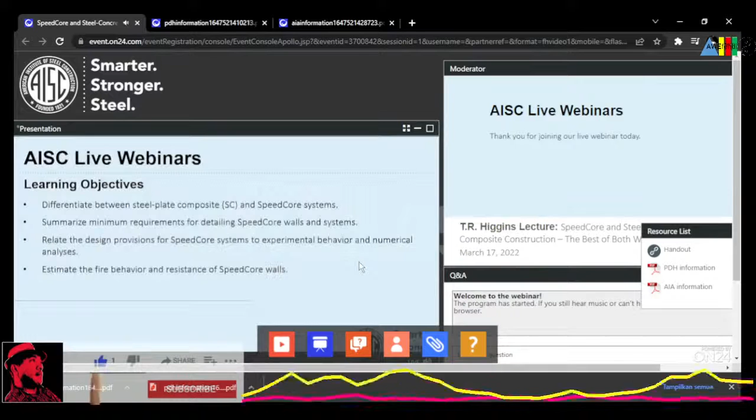Dr. Varma received his bachelor's degree from IIT Bombay, his master's from the University of Oklahoma, and his PhD from Lehigh University. He's been an academic for 20 years, 16 of those years at Purdue University. Varma has dedicated his academic and professional life to the development of innovative steel concrete composite structures for the built infrastructure, including commercial, industrial, and safety-related nuclear structures. He has conducted fundamental research leading to the development of design provisions for composite members, connections, and overall structural systems subjected to extreme loading conditions, including seismic, fire, blast, and impact loading.

Dr. Varma serves on many committees, including being the chair of the AISC Task Committee 8 on Fire Design. He is a member of Task Committee 5 on Composite Design, and he's also a member of the AISC Committee on Specifications, as well as the ASCE 7 Standard Committee.

Dr. Varma has received many awards throughout his career, including the AISC Milek Faculty Fellowship Award, the AISC Special Achievement Award, and the ASCE Shortridge Hardesty Award. Newly added to that list is the 2021 T.R. Higgins Lectureship Award. Today's presentation is the 2021 T.R. Higgins Lecture. Dr. Varma, thank you for being here, and I'll hand things over to you.

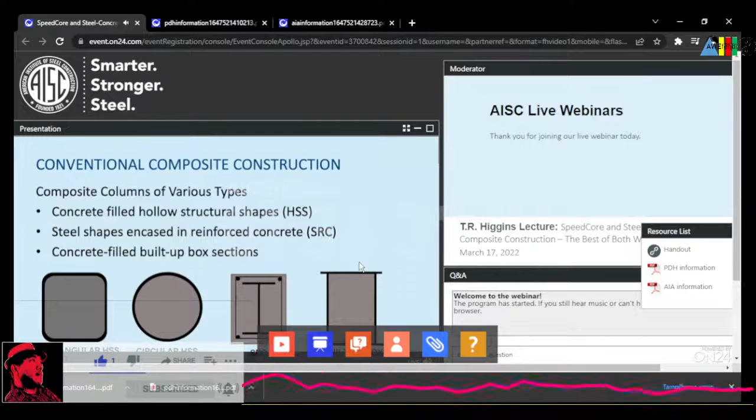Composite columns of various types are now part of the construction folklore. Whether it is concrete-filled hollow sections or concrete encased steel shapes, different shapes and sizes are in use. My first introduction to composite columns came with some prominent examples, like the Columbia Center, 2 Union Square in Seattle, and other innovative designs all around the world.

The 2 Union Square in Seattle deserves a special mention because it inspired my PhD research at Lehigh on high-strength concrete-filled tube columns. It uses these mega CFT columns in the lateral system to optimize design. I mentioned this structure in my dissertation as well.

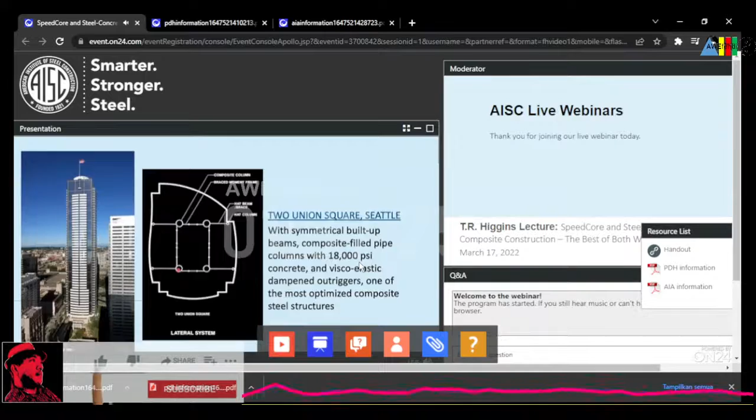Another excellent example of composite construction is the Gateway Tower, or the Seattle Municipal Tower. It uses mega CFT columns at the corners, as shown here. These beautiful structures and others around the world have inspired decades of research and development. We have now got design guidelines and provisions to classify and design different types of composite columns and structures for wind, seismic, and fire loading. Some of our research has contributed to these latest codes and guidelines from AISC.

The SpeedCore system has evolved organically from this past with steel concrete composite construction. C-PSW/CF, or composite walls, consist of steel modules filled with concrete. The steel modules consist of steel plates, tie bars, and maybe shear studs. There are no rebars at all, and no need for formwork or falsework for construction. These composite walls can be used as shear walls or elevator core walls in lieu of conventional reinforced concrete walls.

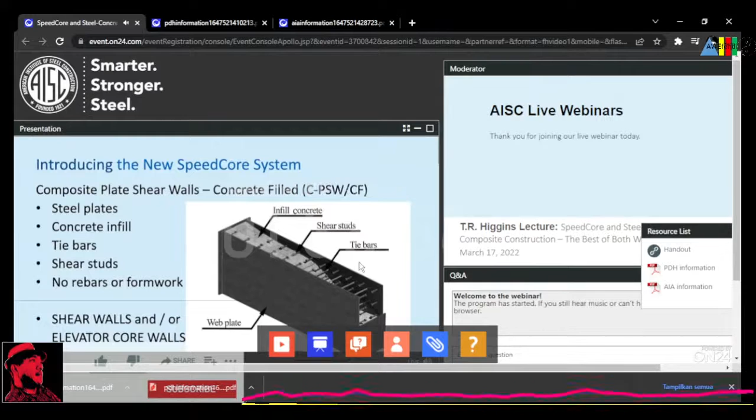The most prominent example of SpeedCore is the beautiful Rainier Square structure in Seattle. Placed next to the Rainier Tower, this building is the newest icon added to the Seattle skyline. Magnusson Klemencic Associates are the structural and civil engineers with some very special partners, architect and client. The contributions, early engagement, and detailed discussions with the steel fabricator and erector were key for the success of this project.

The main reason for considering SpeedCore for this project was the speed of construction. The structure was constructed in 10 months, providing savings of about 8 months as compared to conventional reinforced concrete construction. The structure and its conceiver, Ron Klemencic, are so iconic that they both ended up on the cover of the Engineering News Record.

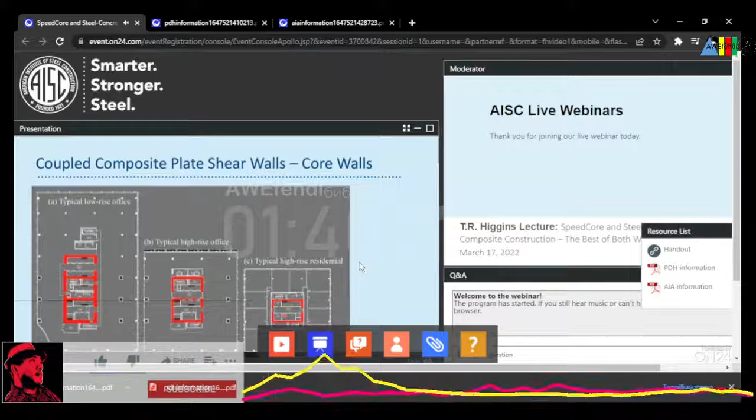From an engineering perspective, the coupled composite core walls are highlighted within the structural floor plans along the structure height here. They are replacing the conventional reinforced concrete elevator core wall structures.

SpeedCore walls are remarkably similar to steel plate composite walls used in the design and construction of safety-related nuclear facilities, like the AP1000 plant being constructed in Vogtle, Georgia. Extensive research has been conducted over the past 15 years on SC walls, and we were able to leverage all these findings for SpeedCore as well. Particularly, the section detailing requirements to prevent local buckling and the shear strength equations are coming directly from this original research on SC walls.

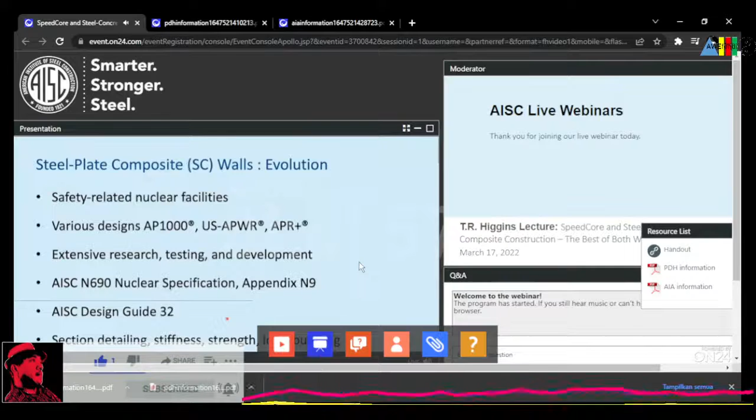Even the containment external building of the AP1000 is made of steel plate composite SC walls, and I was fortunate to conduct the testing, analysis, and support the performance verification of this structure as well.

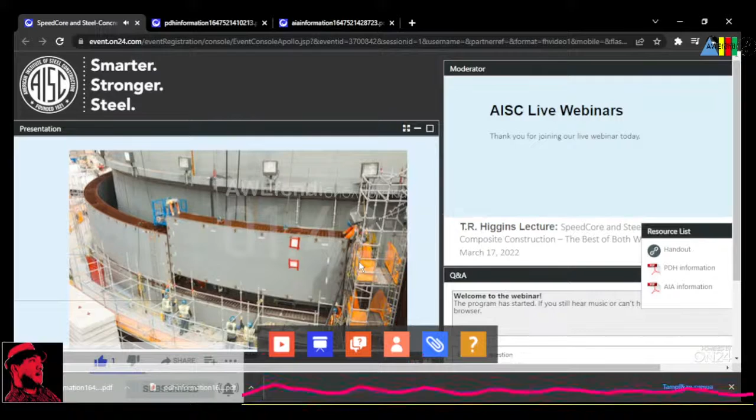Decades of research and work led to the development of the AISC N690 specification, Appendix N9, which covers the design of SC walls for nuclear structures. An AISC Design Guide 32, based on this specification, has been available and used even for SpeedCore projects. I was heavily involved with these publications as well.

That completes an introduction to the system and its use and history.

Since these modules are so technical, and I end up making the presentation remotely due to the pandemic, I wanted to infuse some humor to keep the audience engaged. But all I could come up with were inside jokes.

Module 2 of this presentation will focus on section detailing requirements, limits, and strength provisions. Some of these are leveraged from years of research done on nuclear facilities.

Now, these are the key components of SpeedCore composite walls. Just a reminder or a reference picture, it's really quite simple: the steel plates or module, tie bars and shear studs, and then the plain concrete infill.

For the steel plates, the minimum and maximum reinforcement ratio limits are 1% and 10%. These are based on the range of parameters considered in research. The steel plates have to be connected to each other using ties. These ties can consist of steel bars, rods, or shapes. To prevent local buckling and develop composite action, the steel plates must be anchored to the concrete infill using studs, ties, or a combination of both.

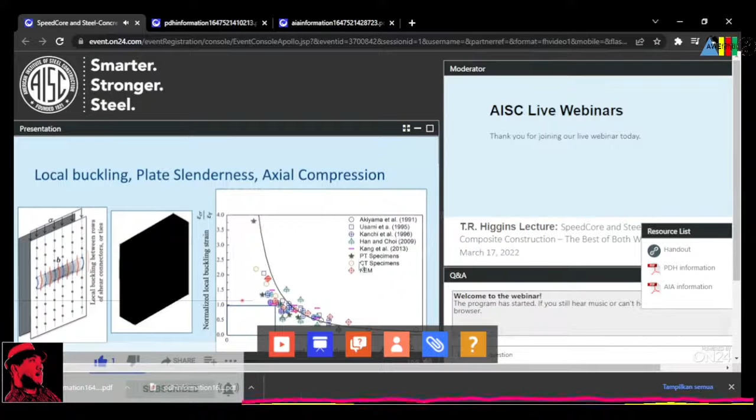Using these experimental and numerical results, plate slenderness requirements were developed to ensure compactness, that is, yielding in compression occurs before local buckling. Equations were also developed for slender plates, but the code requires non-slender or compact plates for design. These requirements are a little tighter for seismic design, as they very well should be.

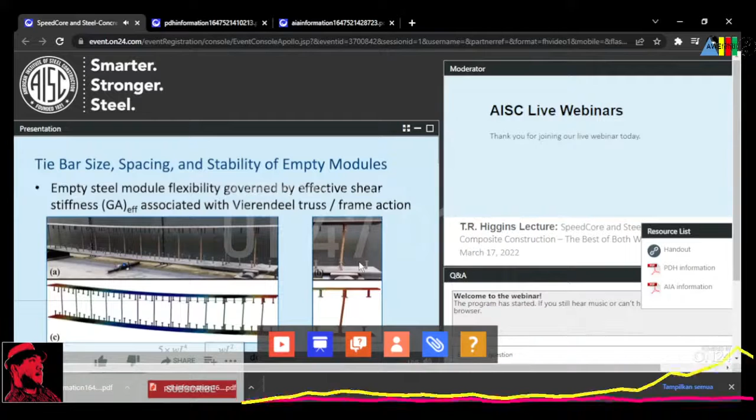Now, the design of tie bars is often governed by the design requirements for empty steel modules before concrete placement. Experimental investigations and numerical studies show that the flexibility of empty steel modules is dominated by the effective shear stiffness associated with Vierendeel truss or frame action. This is useful when considering behavior during transportation, handling, and erection activities. The stability of empty modules during erection, construction, and concrete placement is an important design consideration, which ends up actually governing the tie bar spacing and size and detailing.

We looked at the global buckling of a unit width of the empty module, which is conservative but representative. Unit width is defined by the tie bar spacing in the horizontal direction. We found that the critical buckling of empty modules is governed by the same effective shear stiffness, GA effective, which is based on Engesser's equation of shear buckling, not Euler's. This makes the critical load almost independent of the length and end conditions, which is quite remarkable.

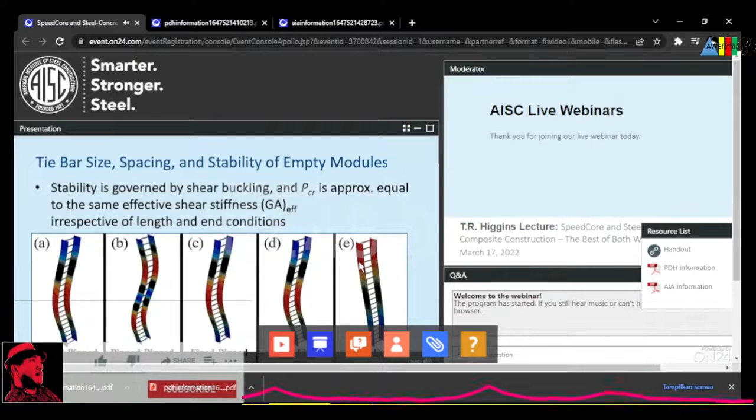We were able to confirm this theory and mechanics-based model of empty module buckling using tests conducted previously at Purdue by some of my senior colleagues. You are seeing the buckling of the empty module right here from our laboratory.

Using these experimental and analytical results, we developed minimum requirements for the stiffness of empty modules to simplify design checks. The minimum tie size and spacing requirements are summarized here. Alpha is the ratio of the steel plate flexural stiffness to the tie bar flexural stiffness. It governs the value of GA effective and thus the tie spacing to plate thickness ratio.

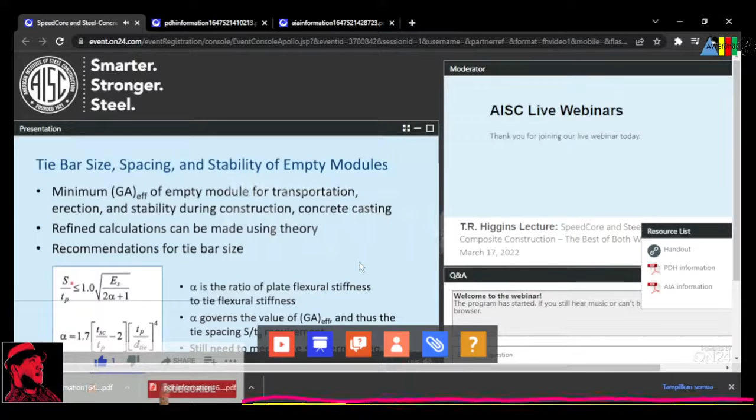This requirement is to be used along with the local buckling slenderness requirement presented earlier. Together, these two govern the section detailing of composite walls. For instance, an example calculation here shows that for a 24-inch thick wall with half-inch thick steel plates and 1-inch diameter tie bars, it requires a maximum tie spacing of 25 inches for global stability and stiffness of the empty steel modules.

But it also requires a maximum stud or tie spacing of 14 inches for local buckling in the composite phase after the concrete has set. Both these requirements have to be met, and therefore different design details are possible. One, only with ties with a spacing of 14 inches and a diameter of 1 inch. Or with tie spacing of 24 inches and corresponding stud spacing of 12 inches to meet both the requirements.

Now these are the recommendations for the effective stiffness values when modeling SpeedCore walls for analysis for calculating design demands. The stiffness should account for concrete cracking corresponding to the design scenario. Now the engineer can perform a section moment curvature analysis to estimate stiffness and account for the extent of concrete cracking, which can be quite limited if drift governs the design for lateral wind loading. In the absence of better information, we have provided some simple stiffness recommendations for the engineer to consider or use in their design.

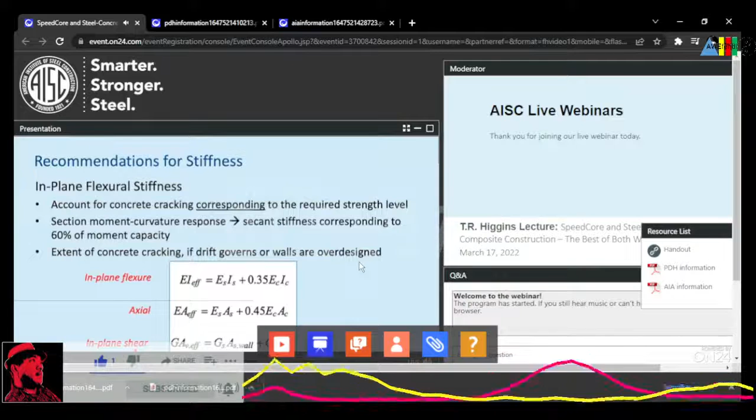The in-plane flexural strength of steel plate composite walls can be calculated using the plastic stress distribution over the composite cross-section. It's quite simple, with the steel limited to yield stress Fy in both compression and tension, and the concrete limited to 0.85 F prime C in compression. Equations have been developed for calculating the plastic moment capacity. These equations are provided in a design guide, which I will mention at the end of my talk.

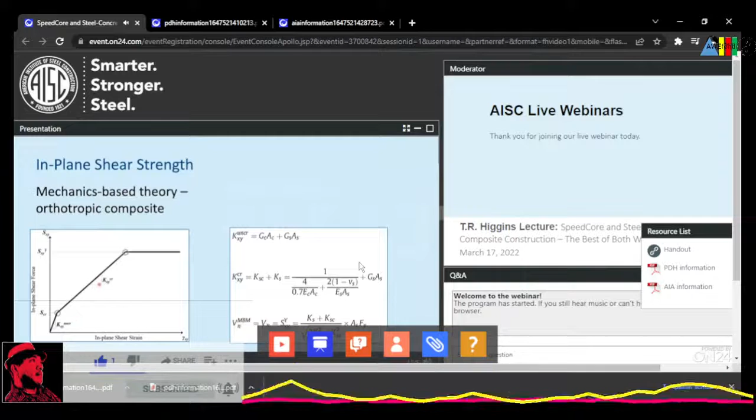Eventually, the in-plane shear strength is governed by von Mises yielding of the steel plates, while the concrete compressive stress is limited to values less than 0.7 F prime C. Equations for estimating the stiffness before cracking, after cracking, and the in-plane shear strength corresponding to the von Mises yield strength are all provided.

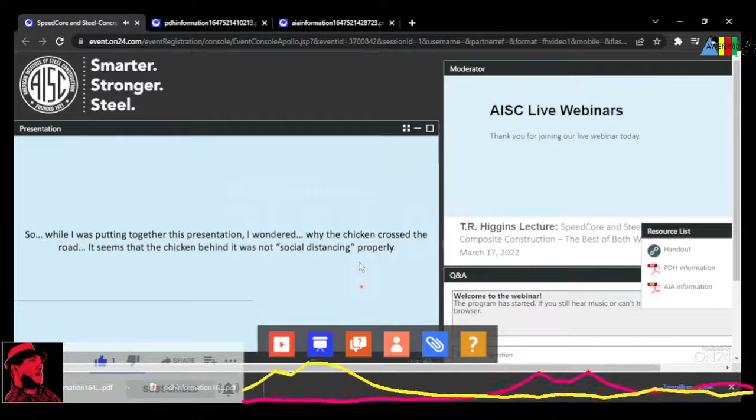Since I was putting together this presentation, I wondered why the chicken crossed the road. It seems that the chicken behind it was not social distancing properly. Just a little bit of humor to address the dryness of the technical presentation.

The third module focuses on the in-plane behavior of flexure-critical SpeedCore walls, their stiffness, strength, and deformation capacity in particular.

The experimental results that I am about to show are applicable to both seismic and non-seismic behavior and to coupled or uncoupled SpeedCore walls.

The parameters considered in the experimental investigations were the axial load level, plate slenderness ratio, tie bar size and spacing, and the use of shear connectors along with tie bars. This module will summarize the test matrix, setup, the loading protocol, and the observed experimental behavior along with detailed findings.

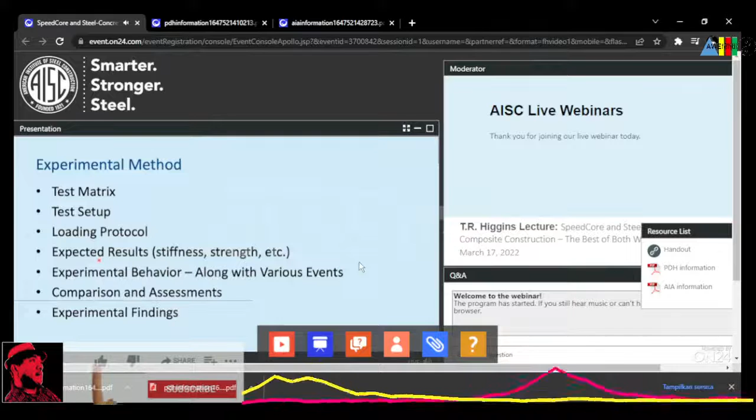The specimens were approximately 1/3 scale models of composite walls. Their thickness was 9 inches. The steel plate thickness was 3/16 of an inch. The wall length was 36 inches and the height to length ratio was 3. Definitely a flexure critical wall.

The axial load level varied from 10% to about 30% of Ag f prime c. The plate slenderness ratio limit was 26, so there were specimens within the limit and just outside the limit as well. Two tie bar spacings, equal to wall thickness and wall thickness divided by 2, were considered.

Here are some of the structural drawings of the specimens along with the test matrix and the parameters identified. Three of the 5 specimens were identical, with the only difference being the axial load level.

The 4th specimen had higher plate slenderness ratio and tie bar spacing. The last specimen introduced shear studs in between the tie bars to reduce the plate slenderness value, again back to within the limit.

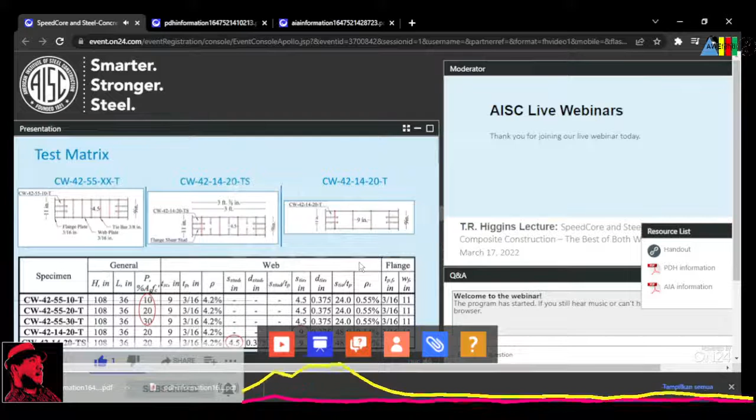The tie bars were fillet welded from the outside, which worked quite well in the specimens and also in the actual structure.

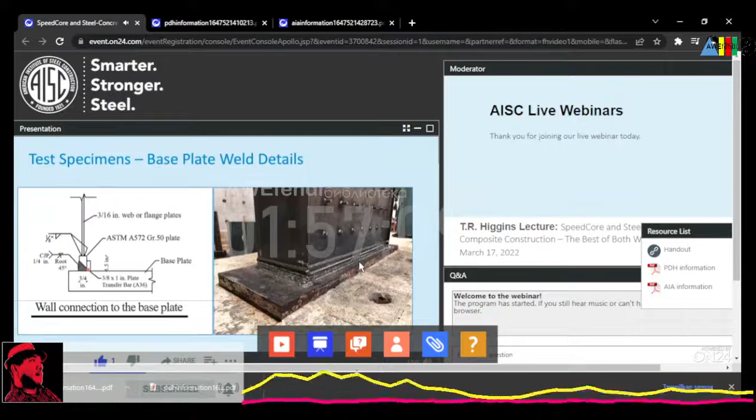A special welded detail was used to connect the 3/16 steel plates to the base plate. The 3/16 plates were fully welded to a 3/4 transfer bar in the shop. The 3/4 transfer bars were CJP welded to the base plate in the field. Now this is only needed for the test specimens because the steel plates were scaled and therefore thinner.

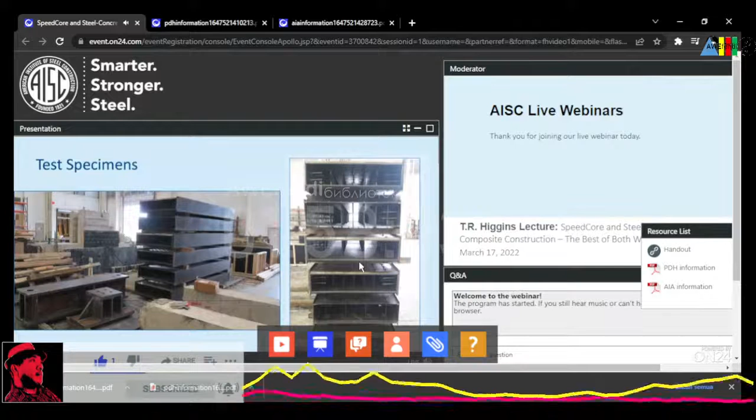This is showing photographs of empty steel modules of specimens in the laboratory. You can see the different internal details and configurations. Self-consolidating concrete with a nominal compressive strength of 6,000 psi was used to fill the modules.

The ATC-24 cyclic loading protocol was used with 6 elastic cycles used to establish yield displacement values, delta Y, and several inelastic cycles at different multiples of delta Y.

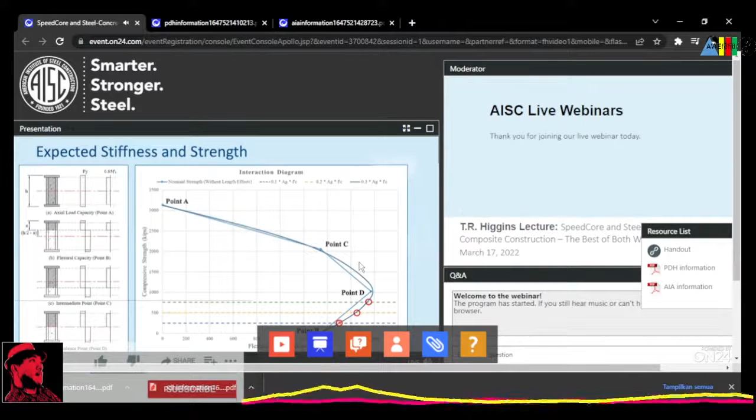The expected flexural strength, calculated using the plastic stress distribution method for composite columns, was used. Accounting for the effects of axial force and PM interaction, the flexural capacities for the specimens were estimated using this method.

Extensive local buckling occurred during the 3 delta Y cycles, which was point C, corresponding to the occurrence of web local buckling as well.

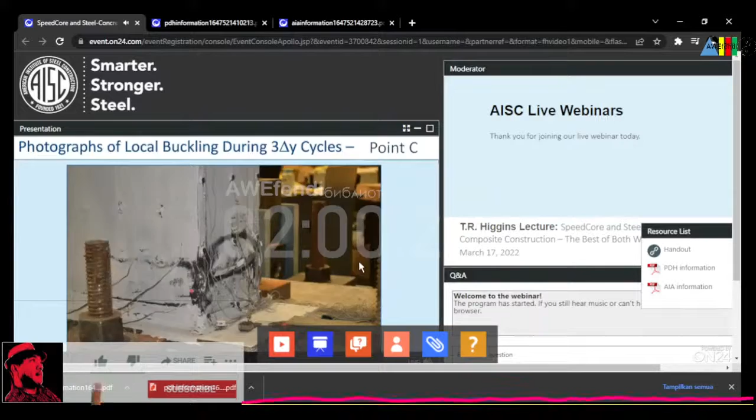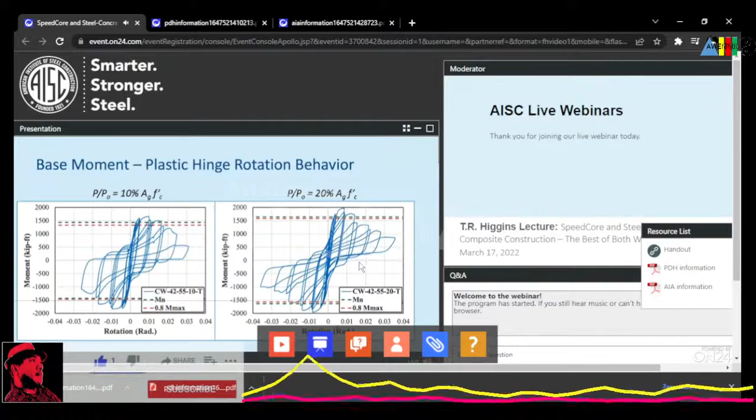This slide shows the base moment versus plastic hinge rotation responses for a couple of those wall specimens with axial loading of 10% and 20%. The x-axis is the rotation in radians. We can use these moment versus rotation plots in a couple of ways.

The fiber-based moment curvature response was then used to evaluate the steel and concrete strains at various events along the moment curvature response. Peak load was reached consistently when the steel reaches 2 times the yield strain in compression, or a strain of about 0.004.

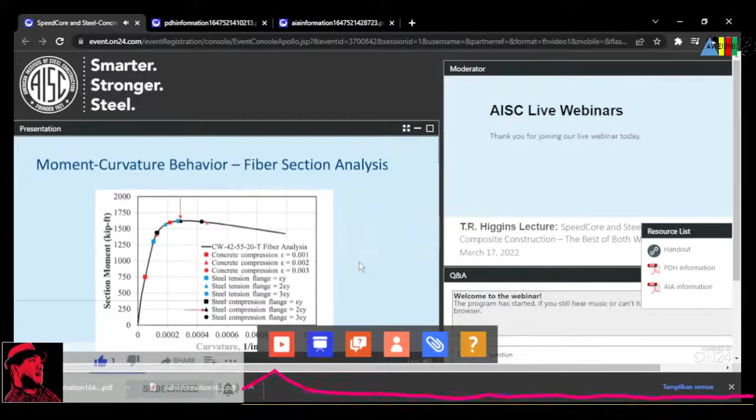The behavior in the elastic cycles was used to assess different flexural stiffness values: the gross uncracked stiffness, the cracked EI effective for moment curvature analysis, and the AISC EI effective equations.

The initial stiffness compares well with the gross uncracked stiffness. The secant stiffness compares well with the cracked EI effective values, both from the moment curvature analysis and also with the AISC EI effective equations.

The plastic rotation capacity of the hinges at the base of the wall specimens were determined and assessed. All specimens have plastic rotation capacity between 0.014 and 0.02 radians, which is quite good. The rotation capacity decreases slightly with axial load level and also with the larger tie spacing.

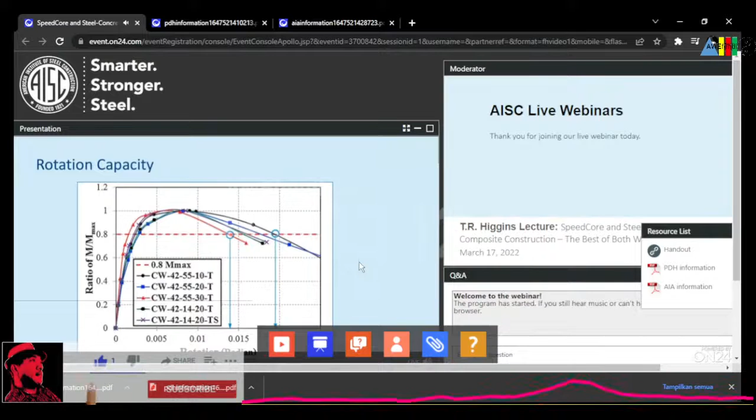In summary, the plastic stress distribution method and fiber analysis method can be used to estimate the flexural capacity and the flexural stiffness of wall specimens. The behavior is consistent with that of composite columns.

Plastic rotation capacities were in the range of about 0.015 to 0.02 radians, which is very good. Peak moment corresponds to steel compressive strain of 2 times the yield strain. And the fiber models are quite effective in modeling behavior.

This brings us to the end of the third module, focusing on the experimental behavior of flexure critical walls.

Which brings me to an interesting question. What do you call Chewbacca when he has chocolate stuck in his hair? Apparently the answer is a chocolate chip Wookiee.

This brings us to the fourth module, which builds upon the experimental research and develops nonlinear analysis and modeling recommendations.

3 models with different levels of complexity were developed for different purposes: 3D FEM models, 2D FEM models, and then OpenSees fiber-based models.

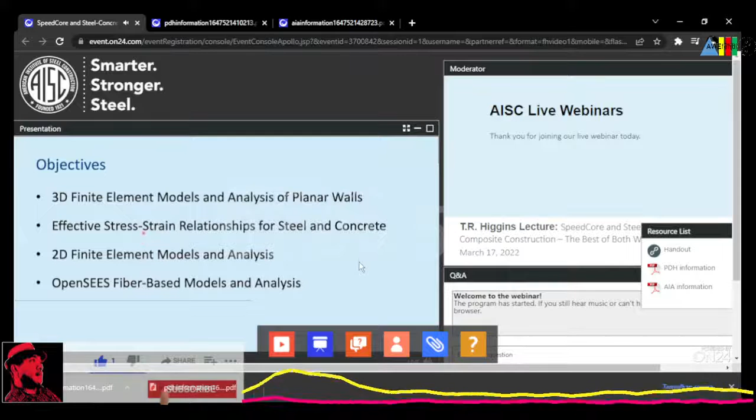All of these models are connected and calibrated to each other, including experimental results, through the use of effective stress-strain relationships for the steel and concrete.

The 3D finite element models were sort of a kitchen sink approach, modeling the entire test setup and all the nuances and details of the specimens, including plates, ties, studs, and their interaction between the steel and the concrete, etc.

3D constitutive models of steel and concrete material plasticity, damage, and fracture were used to model the behavior in detail.

The shear force slip behavior between the ties and the shear studs were also modeled. Concrete compression plasticity, confinement, and tension cracking were explicitly modeled in the 3D FEM models.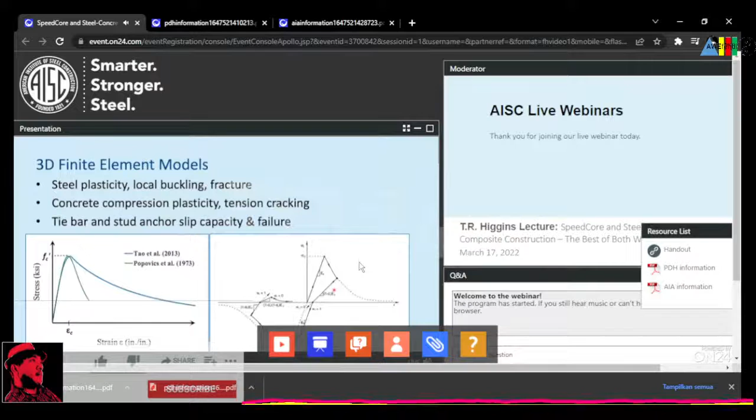The 3D FEM results from the monotonic analyses compared very well with the pre-peak envelopes of the test results. Events such as steel yielding, local buckling, and peak strength compared very well.

However, monotonic analysis did not capture the post-peak behavior because it did not include fracture or did not reach fracture in these monotonic analyses. Multiple cycles of hysteretic behavior are needed for that.

The results of cyclic analysis compare very well with the envelopes of the test results, as shown here. But the hysteretic behaviors in quadrants 2 and 4 were not represented due to the inherent limitations of the concrete material model cyclic behavior that we were using in our program Abaqus.

In summary, the cyclic analyses conducted using the 3D FEM models could simulate the behavior, particularly the envelopes of the responses, including the fracture failure of the steel.

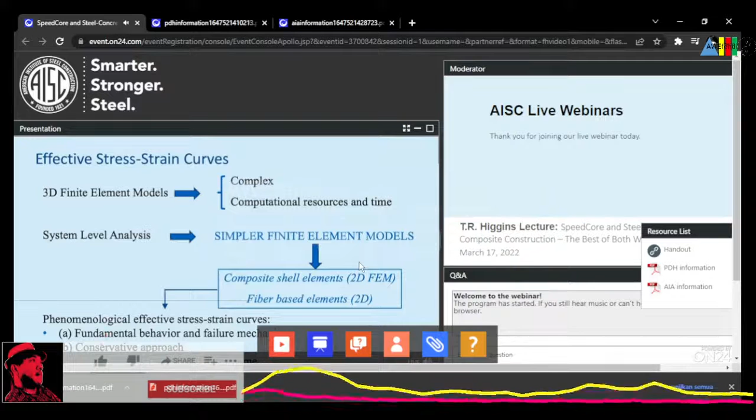However, for system-level analysis, we need simpler 2D finite element models made from layered composite shell elements or 2D fiber element models. Both of these, however, cannot model some aspects of behavior directly. So we developed effective stress-strain curves to indirectly incorporate yielding, local buckling, confinement, etc. conservatively.

We developed these effective stress-strain curves using the results of the 3D finite element analysis by post-processing the results from monotonic analysis and averaging them over the plastic hinges. For example, the effective stress-strain curve of steel plates undergoing local buckling were derived.

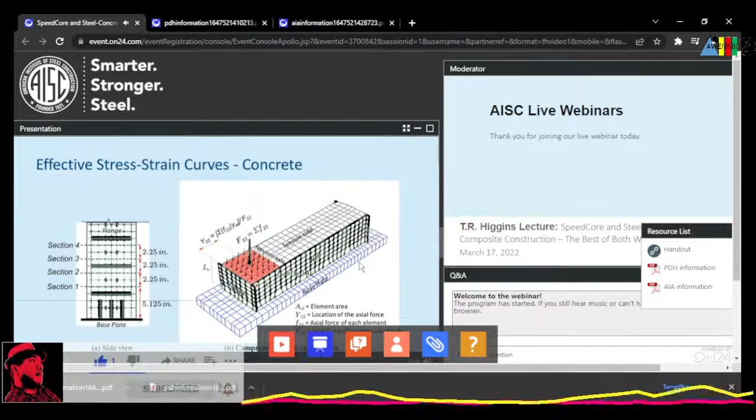Similarly, for the concrete infill, we were able to account for the effects of transverse interaction and confinement by post-processing results from the 3D monotonic finite element analysis. The effective stress strain curves for the concrete in compression, which was confined, were also derived.

These are the simplified, generalized, and conservative effective stress strain curves that we recommend for the steel and concrete fibers to indirectly and implicitly account for yielding, local buckling, transverse interaction, confinement of the concrete, and eventually failure as well.

We implemented these effective stress strain curves in a simple 2D finite element model using layered composite shell elements for the composite walls and truss elements for any of the flange or closure plates.

And the results were quite comparable to the much more complex 3D finite element models. Whether you look at monotonic behavior or you look at cyclic behavior, the 2D FEM models run orders of magnitude faster and give approximately the same or comparable results with the 3D finite element models.

Therefore, we use these 2D models extensively for system-level seismic analysis.

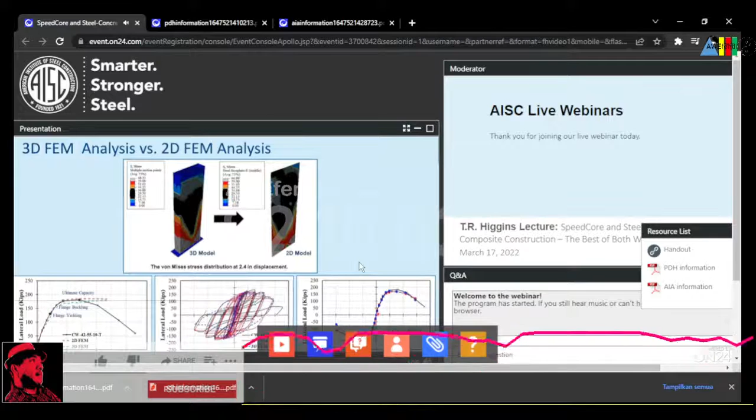Similarly, we use these effective stress strain curves along with the 2D fiber-based element in OpenSees. And the results compared even better with the test results because these models can better account for the cyclic behavior of concrete with pinching in quadrants 2 and 4 of the cyclic behavior.

The next module focuses on the seismic behavior and capacity design principle for the SpeedCore systems.

Now, seismic design can be performed according to ASCE 7 standards and the AISC 341 seismic provisions. Performance-based design can also be conducted, but it is a little bit beyond the scope here. However, the numerical models needed for performance-based design are similar to those I just presented in Module 4.

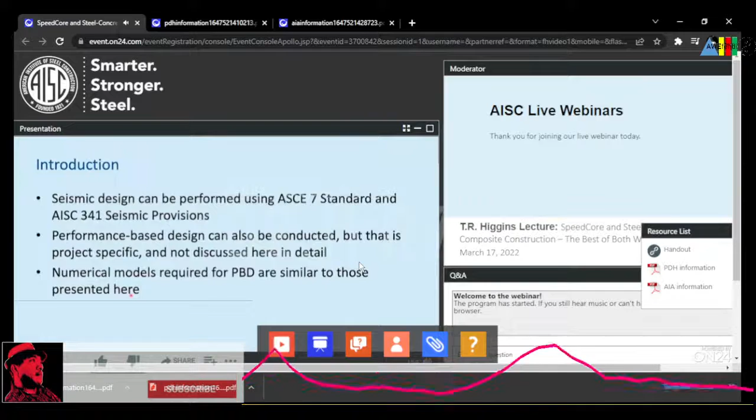In seismic design, the concept of response reduction factor R, the overstrength factor omega naught, and the displacement amplification factor CD are well known. Depending on the ductility of the structure, we take higher values of R to reduce the earthquake force demands and calculate the inelastic drift by multiplying the elastic drift by a CD factor.

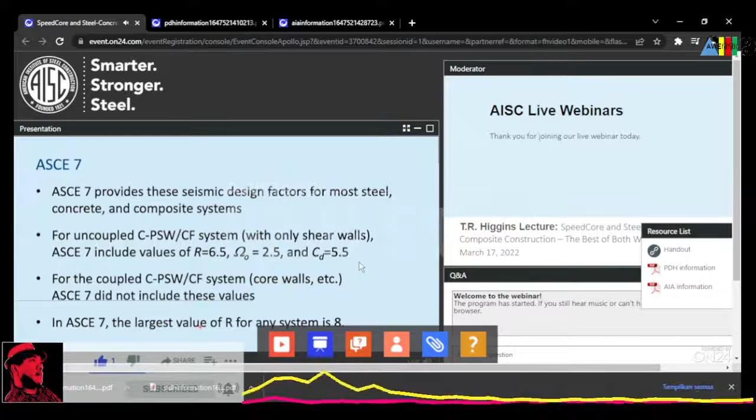ASCE 7 provides these factors. For the uncoupled SpeedCore system, the R value was already listed at 6.5. For the coupled SpeedCore system, ASCE 7 does not provide an R value. The highest value for R for any system in ASCE 7 is equal to 8.

Now, FEMA P695 is a systematic procedure to assess the seismic collapse margin of structures designed using a set of design criteria and seismic factors R, omega naught, and CD.

The process includes many steps, the first of which is having a consistent design method, using it to design several groups of archetype structures, developing nonlinear models able to model the failure modes of the structure, and subjecting them to a scaled suite of ground motions.

These ground motions are scaled to conduct incremental dynamic analyses, and finally, statistical evaluation of the results is performed and the collapse margin is assessed. That is the FEMA P695 procedure.

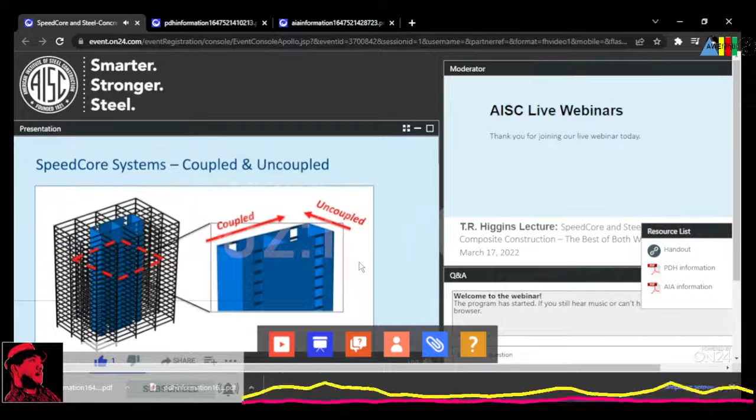It is important to note that there are two types of SpeedCore systems, coupled and uncoupled. Both are viable and acceptable. In fact, in the same building structure, SpeedCore can be coupled in one direction and uncoupled in the other.

Uncoupled SpeedCore walls of different cross sections are possible, with planar walls and C-shaped walls being common. Walls with semicircular or circular boundary elements are also possible.

For the uncoupled SpeedCore system, seismic design provisions were already provided in AISC 341, 2016, but enhancements have been added in the upcoming 2022 revisions.

The uncoupled walls are required to be flexure critical, with height to length ratio greater than or equal to 3. And walls are required to have boundary elements or flange plates. These are the enhancements added in 2022.

A comprehensive FEMA P695 study was performed on the uncoupled SpeedCore walls, and the R factor of 6.5 given in ASCE 7 was verified. The study included several archetype structures, including 3 to 12-story structures with planar walls, 15 to 22-story structures with C-shaped walls.

Nonlinear models, dynamic analysis, and the whole nine yards were conducted for the 22 sets of FEMA ground motions that were scaled.

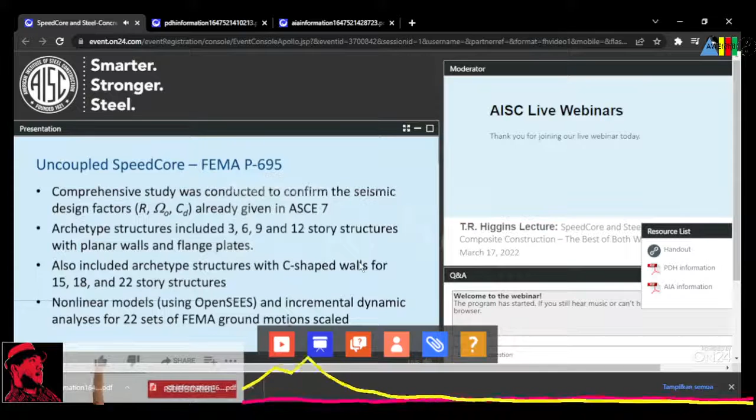Statistical analysis of the incremental dynamic analysis showed that all the archetype structures with uncoupled SpeedCore walls designed according to the AISC seismic provisions passed the adjusted collapse margin ratios set forth by FEMA P695. Even though collapse was defined quite conservatively with 3% drift ratio, where the SpeedCore walls had not yet failed.

Now, this portion is not the focus of this presentation, but the report on the FEMA P695 studies of the uncoupled SpeedCore walls is available in AISC, and the link is mentioned in the end.

For the coupled SpeedCore system, we decided to target the R factor of 8, which is the highest possible in ASCE 7. Additional system-level ductility beyond that of the uncoupled system can be achieved by spreading the inelastic behavior and yielding along the height of the structure. This was a great opportunity to develop a capacity-based design method to achieve excellent seismic behavior.

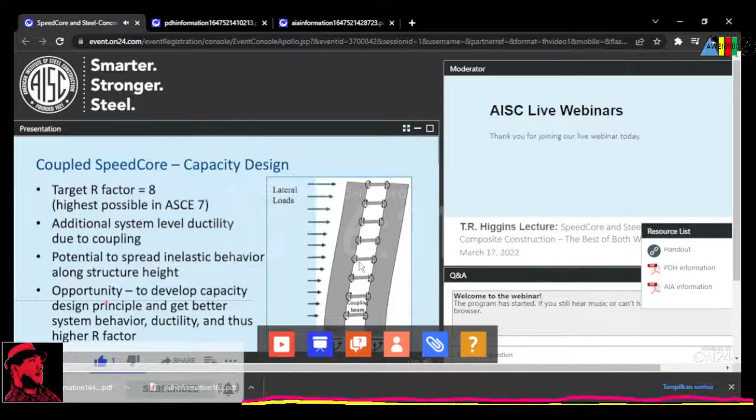There are really two potential sources of inelastic deformations in the coupled SpeedCore system: flexural plastic hinges at the ends of the coupling beams and flexural yielding at the base of the walls. The preferred mechanism is to form hinges in most of the coupling beams along the height of the structure before the last hinges form at the base of the walls. Basically, a strong wall, weak coupling beam design approach.

Coupling beams spread plasticity along the height and eventually fracture, while the composite walls continue to provide inelastic behavior. For seismic design, the coupling beams will also be composite concrete-filled steel box sections, which is a shout out back to module 1 of this presentation when we talked about concrete-filled composite sections.

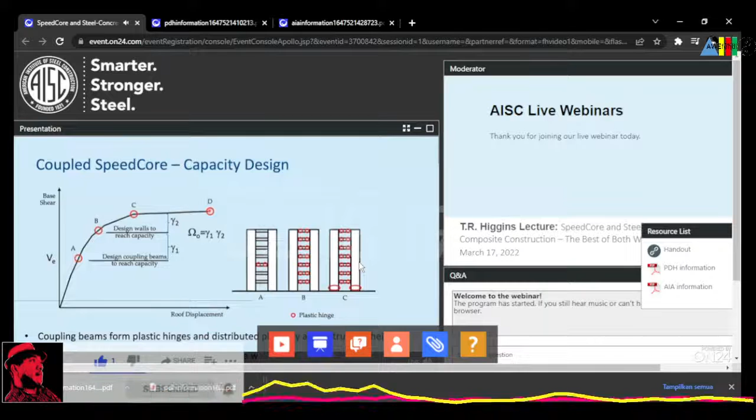Now this slide shows the target nonlinear pushover behavior. The composite coupling beams are designed for the reduced earthquake force with an R factor of 8 at point A. But the walls are designed at point B, which corresponds to greater demands associated with the plastification of all coupling beams along the structure height. Point C is where you develop hinges at the base of the walls as well, and eventually fracture at point D. This is the capacity design principle for the coupled SpeedCore system.

Several archetype structures, including 3 to 12-story structures with planar coupled walls, and 18 to 22-story structures with C-shaped coupled walls were designed using the capacity design method. All the coupling beams were also composite, namely concrete-filled steel box sections, which we saw earlier in Module 1.

Now this slide shows the system-level pushover behavior obtained using OpenSees fiber-based models for 8-story and 18-story structures. The events A through D indicate that the behavior follows the capacity design principle. Coupling beams yield at point A, which is close to the earthquake design force. The beams undergo yielding along the structure height between points A and B. The wall yields, or forms plastic hinges, at point C, and fracture of the coupling beams occurs at point D.

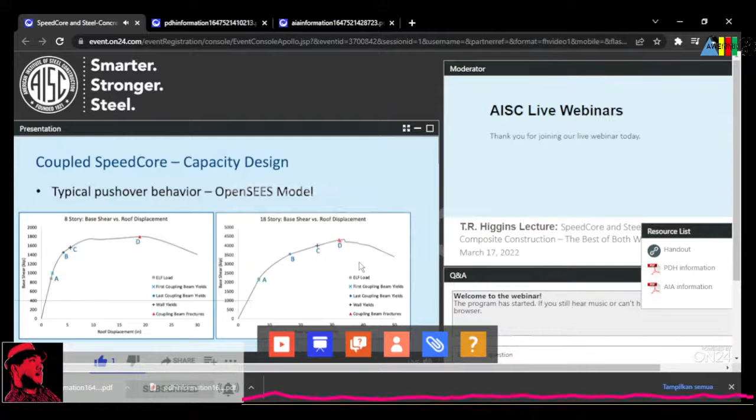Let's confirm this behavior for earthquake-induced cyclic loading by nonlinear time history analysis. Let's take the ground motion record and scale it according to FEMA P695 to be the design basis earthquake for the same 8-story structure.

Only a few events, for example initiation of coupling beam yielding and initiation of yielding in the walls, occur in this response. There is some spread of yielding along the height and some initiation of yielding at the base of the walls, as seen here in these post-processed pictures.

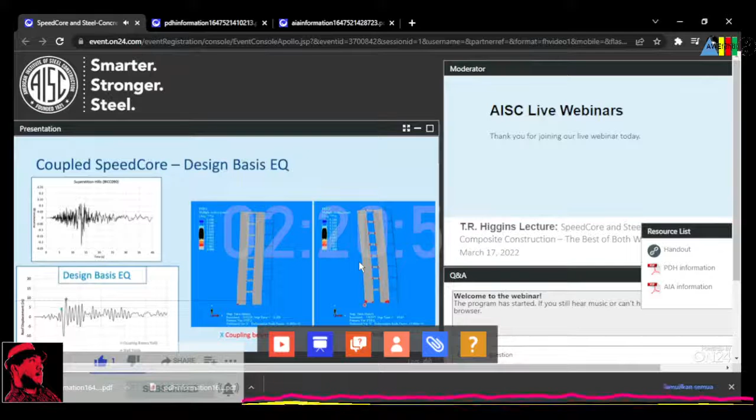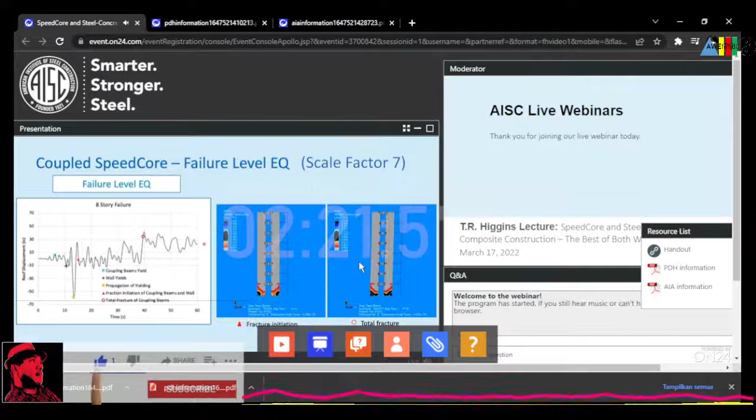For the failure level earthquake with a scale factor of 7, corresponding to a 5% story drift, all events occur in a similar order. The coupling beams undergo yielding, the walls undergo yielding, there is propagation of yielding all along the height of the structure in the coupling beams. There is initiation of fracture in the coupling beams, and then total fracture of the coupling beams at the end of the record. The walls do not collapse, just some large permanent deformations occur at the end of the record.

Let's watch a video of the seismic behavior simulation for the failure level earthquake. This video shows the time history response of the structure subjected to the scaled earthquake level, causing a drift ratio of about 5%. The ground motion is on the top, and the cyclic roof displacement response is shown on the bottom. The contoured plots show extensive yielding in the coupling beams along the height of the structure and at the base of the walls.

The black color in the contour plots indicates fracture at the ends of the coupling beams and the initiation of fracture at the base of the walls. This is the response for the failure level earthquake that corresponds to an interstory drift of about 5%.

At the end of the record, there are some permanent deformations, but there is no collapse or failure of the system.

This module summarized the seismic behavior and the capacity design principle. Let's take a look at a short module on the seismic performance requirements for the coupled SpeedCore system.

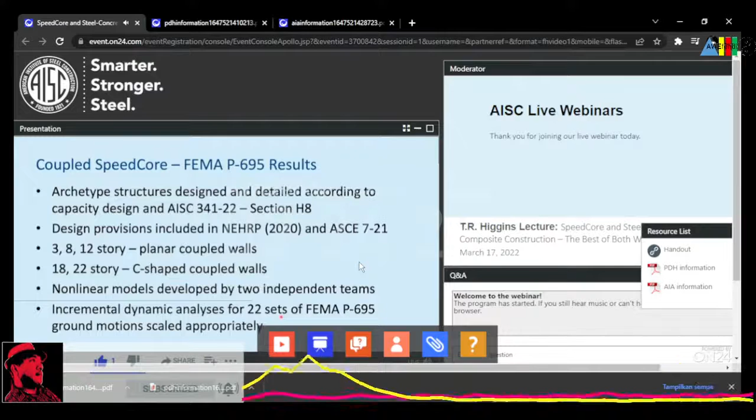A conservative failure criterion of 5% drift ratio was used, as the structure did not fail or collapse. Thousands of incremental dynamic analyses were conducted and the results evaluated statistically.

The collapse margin ratios met the FEMA P695 criterion with good margin, and all the seismic design factors were verified. Consequently, the R, omega naught, and Cd values were verified and accepted into the ASCE 7 standard in the upcoming edition of 2022.

The upcoming AISC seismic design provisions in section H8 for the coupled SpeedCore system are based on the FEMA P695 studies and the capacity design principle. Some additional requirements are placed on the coupled SpeedCore system.

The wall height to length ratio is limited to 4. The coupling beams are required to be concrete-filled composite sections with flexure-critical behavior and length-to-depth ratios between 3 and 5. All of these limitations were based on the archetypes included in the FEMA P695 studies and the desired ductility.

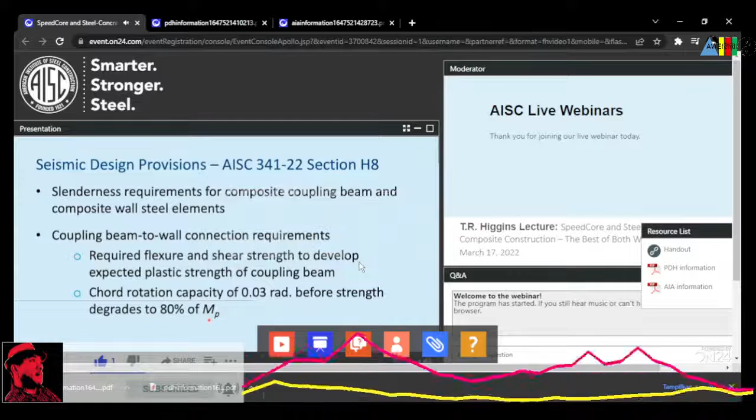In summary, we need coupling beam to wall connections that can meet these performance requirements for strength and deformation capacity. Some were tested in the past, and additional testing has recently been completed.

The coupling beam elements, which include the flanges, the webs, and the concrete infill, have to be connected to the composite wall to transfer all the stresses and forces.

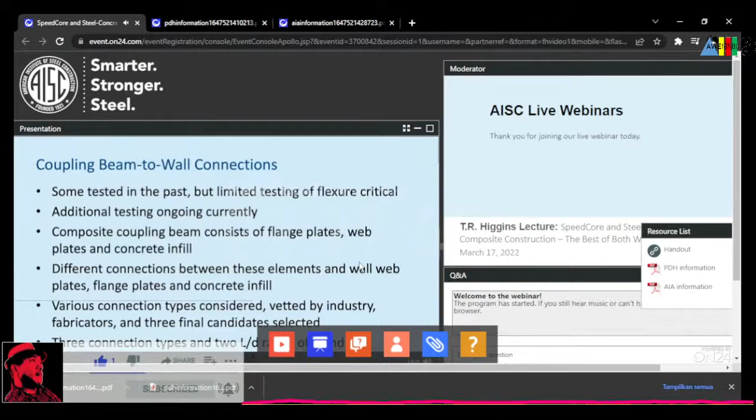Various connection types have been considered, vetted by the industry and fabricators, and 3 final candidates were selected. Two coupling beam length to depth ratio extremes are being considered, of 3 and 5. Thus, 6 connection tests have been conducted recently.

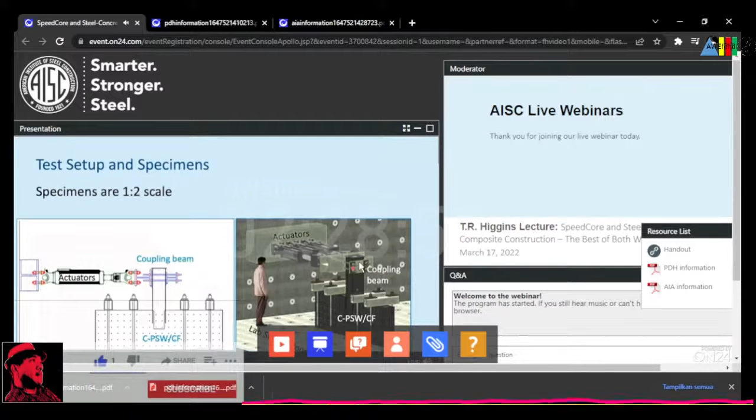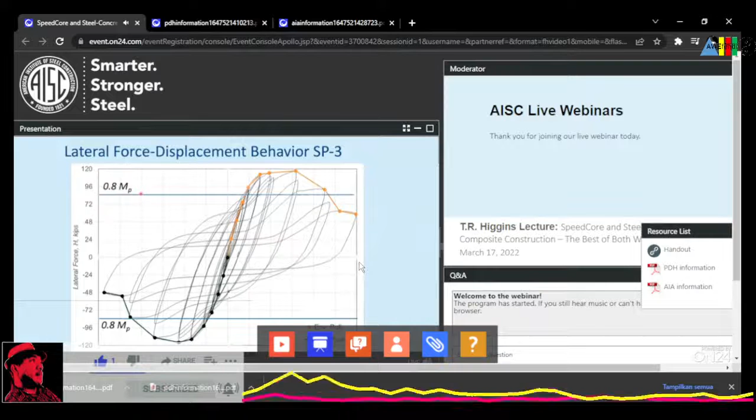This is the lateral force displacement behavior of the specimen subjected to the ATC 24 loading protocol. You're seeing the lateral force versus beam end displacement response. The backbone curve has been identified, and 80% of MP horizontal lines have also been shown.

This slide shows the envelopes of the beam end moment versus chord rotation response for connection 1B, showing a rotation capacity that is in excess of 0.037 radians, as shown here.

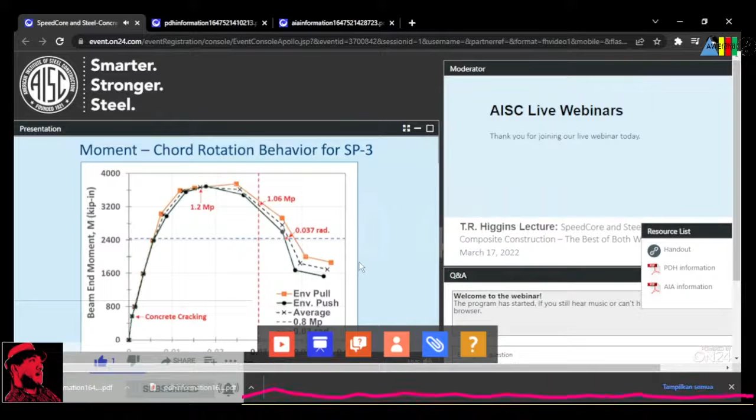Let's watch a time-lapse video of the connection performance, particularly in the combined 1 to 5 delta Y cycles. Since the connection region is whitewashed, you will be able to see the yielding of the steel plates, followed by local buckling of the flanges, and then the webs. Eventually, the fracture of the connection through the flange plates and the webs will be evident.

Beginning to see the initiation of fracture, the local buckling of the flanges and the webs. You're seeing that, and then the propagation of fracture through the connection.

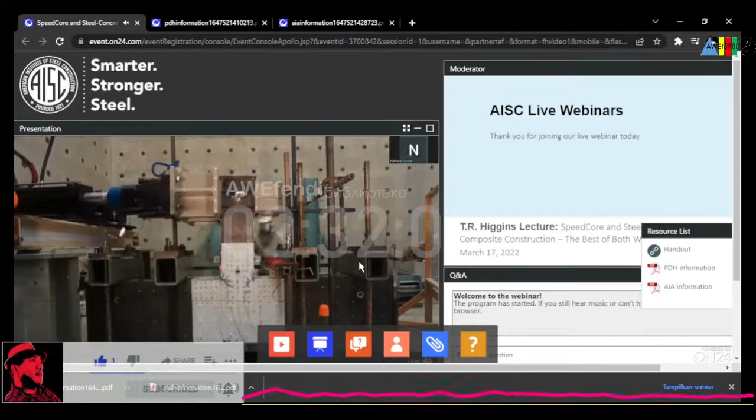In summary, coupling beam to wall connections have been tested and validated for SpeedCore. Additional testing is underway, and so far 2 connection types have been completely verified for the SpeedCore application with different length to depth ratios of 3 and 5, showing acceptable performance.

This brings us to one of the last and perhaps most important modules, which focuses on fire resistance and design. The focus is on fire resistance of unprotected composite walls.

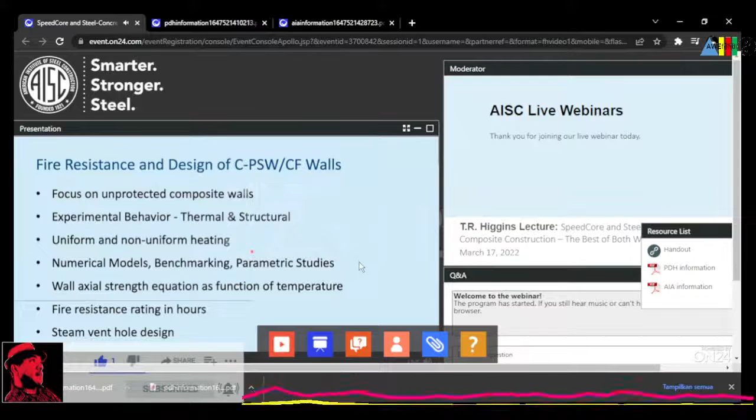We have looked at thermal and structural behavior to uniform and non-uniform heating, both experimentally and numerically. I will talk about the numerical models that were developed, benchmarked using test results, and then used to conduct parametric studies. All the results were used to develop equations for calculating strength as a function of temperature and the fire resistance rating in hours. I will end with a brief discussion of vent hole design and its need for composite walls.

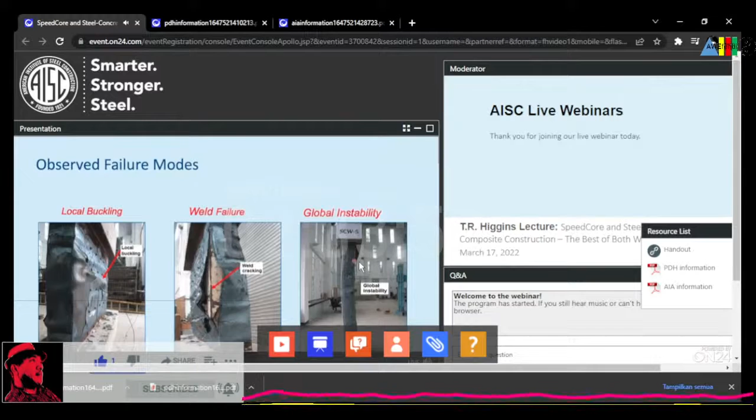We conducted our experimental investigations on the same wall specimens we had used earlier in Module 3 of this presentation for cyclic testing. Since the failure in those tests was localized at the base, we were able to reuse the remaining length of the specimen for fire testing.

Specimens were 9-inch thick with 3/16-inch thick steel plates, slenderness ratios of 24 and 48. Both uniform and non-uniform heating were included. The actual load levels in the tests were about 20 to 30% of the wall concrete strength.

We used a self-reacting structural test setup, similar to the column setup used in the past. The ends of the wall specimens were cast in reinforced concrete blocks at the ends. Axial loading was applied using a hydraulic ram, and cylindrical bearings were used at the ends to achieve pin end conditions.

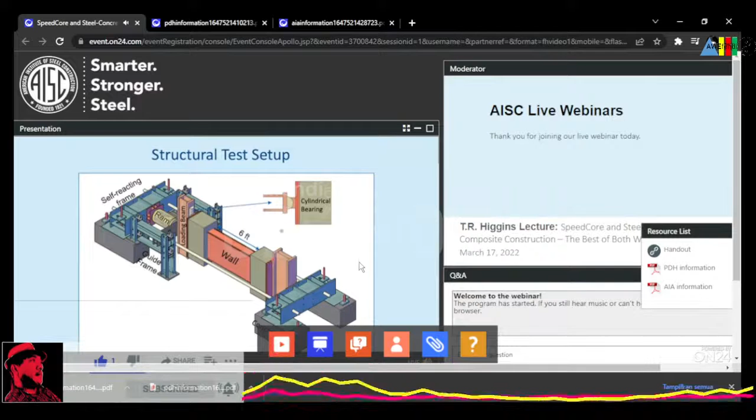Thermal loading was applied using ceramic fiber radiant heaters that surround the specimen completely. These heaters can be controlled to apply different surface temperature time curves. In these tests, they were used to apply the effects of standard fire temperature time curves directly to the specimen surfaces.

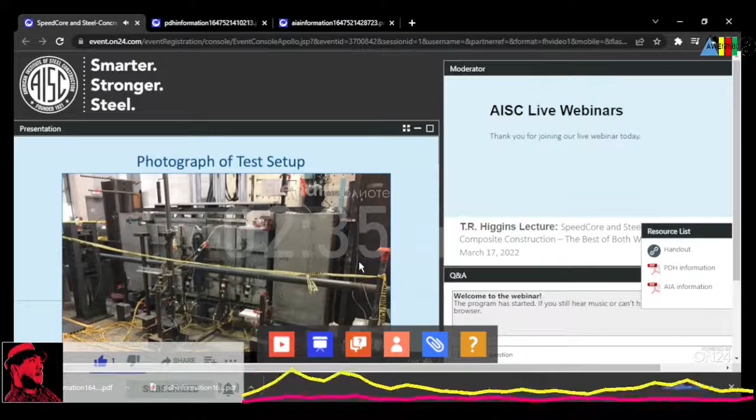This is showing a photograph of the specimen with the structural setup and the heaters all around it. Thermocouples and other sensors for measuring thermal and structural behavior can be seen.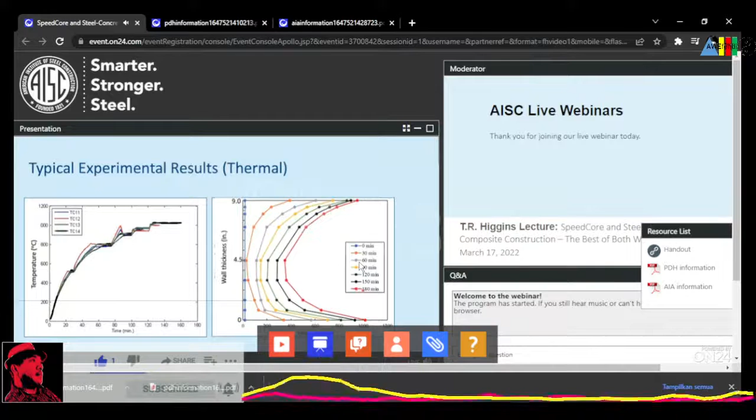Let's look at some typical experimental results with the measured surface temperature time curves shown on the left. Surface temperatures exceeding 1000 degrees centigrade can be seen. The thermal gradient through the 9-inch thick wall is shown on the right. There was a large nonlinear thermal gradient that stays through the cross-section even after several hours of heating. The central concrete core temperatures are quite low.

Let's look at some more results. This slide shows the axial displacement versus time, and also with respect to the surface temperature, for all the specimens subjected to uniform heating. There were really no significant events, failure, or loss of axial load capacity. The behavior was stable for axial load levels up to 30% and heating up to 3 hours, even for the 9-inch thick small scale specimens.

Photographs of the specimens after heating showed some local buckling of steel plates in the heating regions. The local buckling occurred between rows of shear studs or ties as expected. Post-fire photographs show local buckling between the studs or the tie bars. The wavelength and amplitude of local buckling changes with the tie spacing.

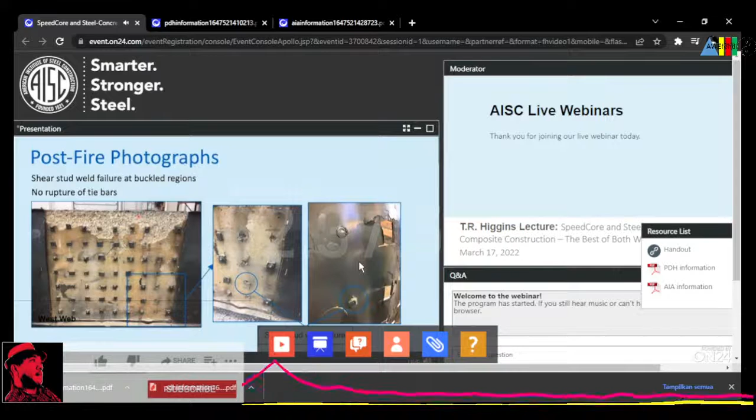No failure either. In summary, even the small scale 9-inch thick specimen had more than 2 hours of fire resistance, though the effect of steam vent holes needs to be considered, which we will talk about soon. When non-uniform heating is applied, there is some out-of-plane bending, but no failure.

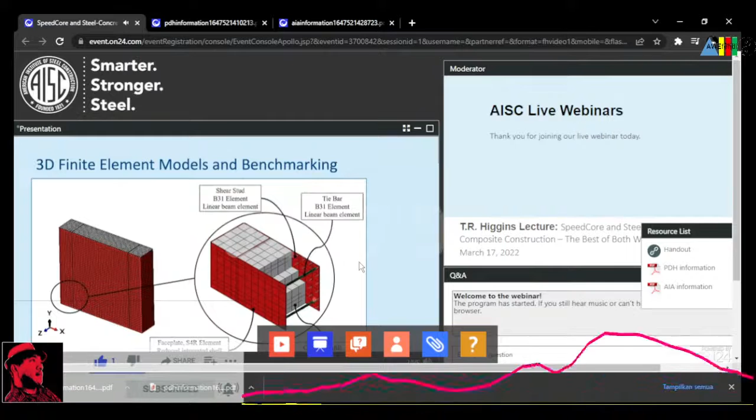3D finite element models of all the tested specimens were developed. All the components were modeled explicitly, similar to previous models, but this time along with thermal and mechanical properties to simulate behavior under fire loading. Now, connecting the thread all the way back to module 2 of this presentation, since composite walls have a lot of possible cross-section shapes and geometries, we idealize the composite wall for analysis. Unit width is defined by the tie spacing, which we summed up along the wall perimeter to conservatively estimate the wall strength.

We developed refined 3D finite element models of the unit width columns to investigate and evaluate behavior. We modeled the steel plates, ties, shear studs, and the concrete explicitly. The models were benchmarked using experimental results from other researchers and also from our test program.

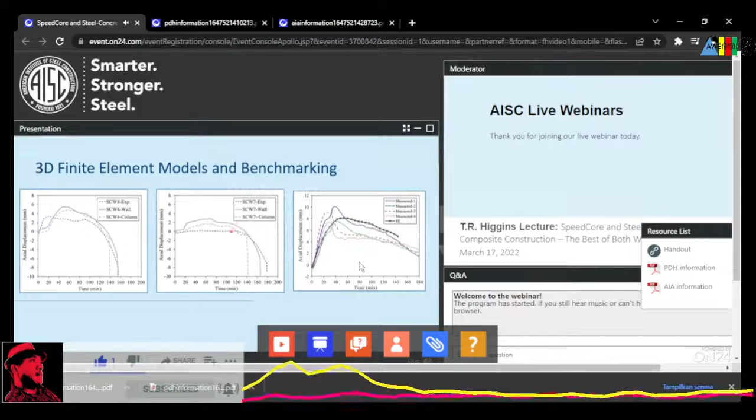Both thermal and structural responses, like the axial displacement versus time, were benchmarked. The experimental results were compared with those from the 3D finite element models and also from the unit width columns. Both models could be verified using the experimental results.

Excellent comparisons between the experimental behavior and the 3D finite element models were observed. For example, here we can see the local buckling between the tie bars for the specimens and the finite element models.

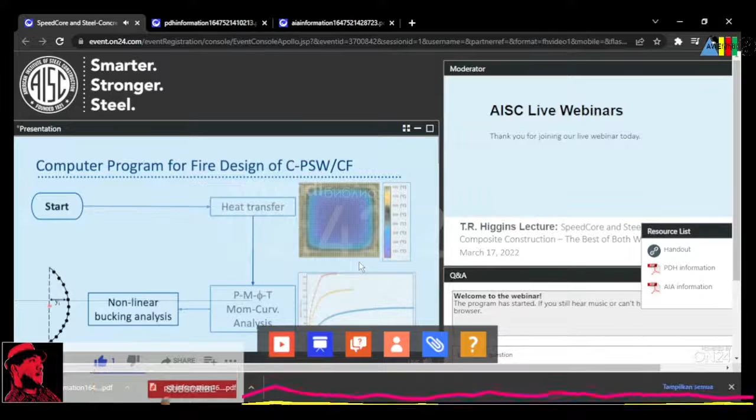We also developed a simpler fiber-based column inelastic buckling analysis program that can account for the effects of fire loading on thermal and structural behavior. It conducts a nonlinear heat transfer analysis to calculate the thermal gradient, a moment curvature temperature analysis for the thermal gradient, followed by column inelastic buckling analysis using these results. Thus, the program does thermal and structural analysis for composite walls and columns.

This is a standalone independent program that you can download from the Purdue repository mentioned here. This simpler model was benchmarked using the detailed 3D finite element models and the experimental results. The program is capable of taking in different fire scenarios, thermal properties and insulation, and different material models also.

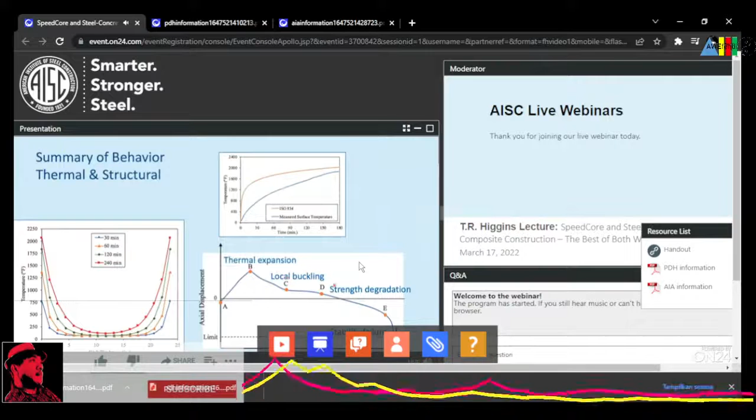Results can be post-processed to understand behavior. For example, thermal gradients through the composite cross-section and the axial displacement versus time response of the composite member is shown here, along with the events identified from post-processing the results. The program was used to conduct extensive analytical parametric studies on unprotected SpeedCore walls.

Various wall geometries and dimensions, steel and concrete material properties, and loading ratios were considered. I won't get into the details of all the results, but summarize them here. Results indicate that the time to failure depends on the wall thickness, the wall height to thickness or slenderness ratio, the load ratio, and also on the end conditions. Generally, walls with story height to thickness ratio greater than 10 reach their strength due to global buckling.

The fire resistance of unprotected composite walls is quite significant, particularly because the concrete infill takes very long to heat up in the thicker walls.

Now, non-uniform or one-sided heating results in thermal bowing and second-order moments in the walls. Only for walls with story height to thickness ratio greater than 20 and subjected to one-sided heating is insulation or fire protection needed on the exposed surface. This is generally not the case because typical wall height to thickness ratios are less than 10.

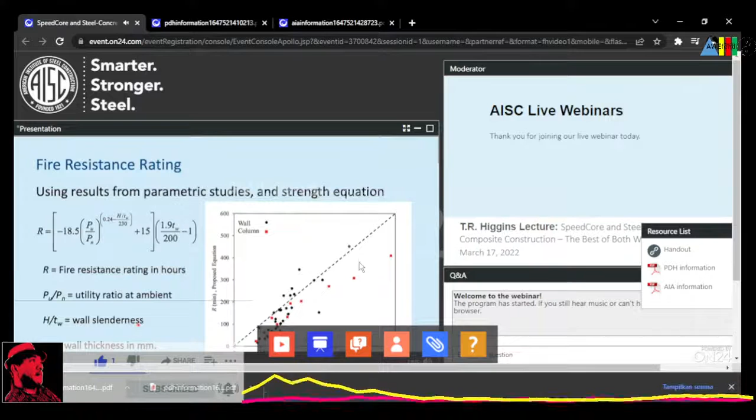Now I want to draw your attention to an important topic. Since this is a concrete filled steel structure, steam from the concrete moisture content can get trapped and develop pressure within the walls.

This video was for the non-uniform heating specimen where one side was not exposed. While the steam venting phenomenon occurs for all faces, it is seen most clearly from the test here. You can see the steam puffing from the vent holes.

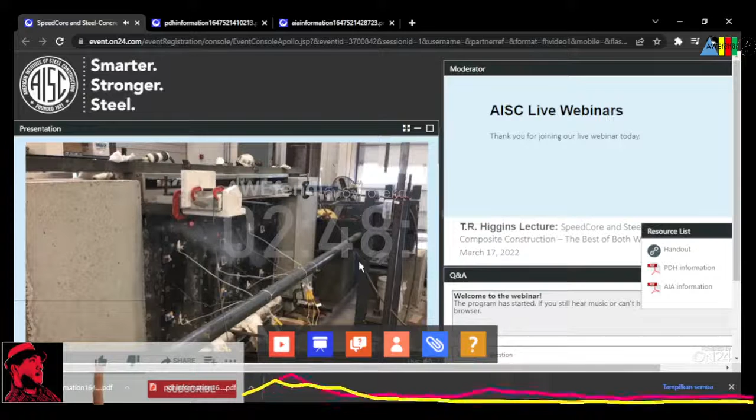The design of vent holes is based on the concept of pressure relief valves in boilers. I am a boilermaker after all.

We calculate the vapor or steam generation rate using the moisture content of concrete and the calculated thermal gradients. We can select an allowable buildup pressure in the steel vessel and design the vent hole area and spacing.

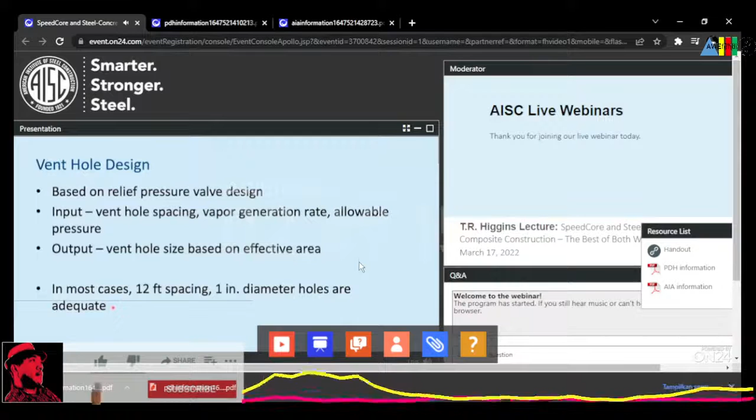The equation is a bit involved to show here, but in most cases, we found that 12-foot spacing in both directions and 1-inch diameter holes are sufficient to reduce the steam pressure down to allowable values. It is simple, but important and quite relieving to the engineer as well. This vent hole requirement is included in the upcoming AISC specification Appendix 4.

Now we have arrived at the end of our long story, but the development and work continues. The research project is now focusing on the use of bolted splices and connections for non-seismic design of SpeedCore walls. This is very promising to improve construction speed and reduce the use of welding, particularly in non-seismic applications.

We are looking at a variety of coupling beam to wall connections and wall to foundation connections for both seismic and non-seismic conditions.

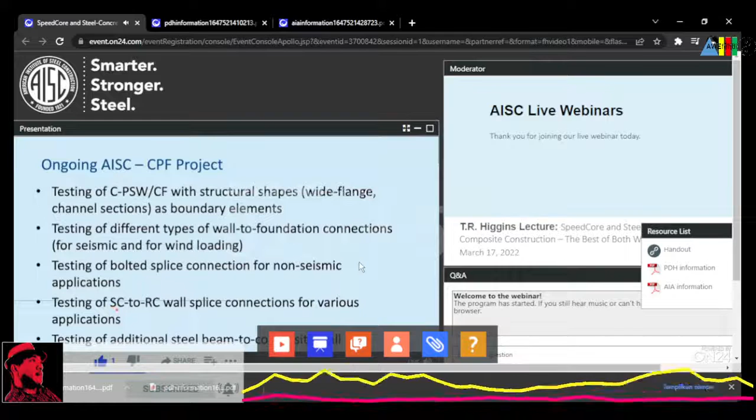We have also been working on a research project focusing on the performance-based fire design of connections between the composite floor system and the SpeedCore walls. This includes testing and analysis. We are just about to begin testing for this project.

I want to mention some publications. All the research and development discussed in this presentation has led to the inclusion of SpeedCore in the upcoming 2022 AISC specification, seismic provisions, and the ASCE 7 standard. The seismic design provisions are also already published as part of NEHRP 2020.

In order to help practitioners and users, we have also co-authored a Design Guide 37 that is based on the research and development in these codes. It is meant for design for wind, seismic, and fire loading.

Design Guide 37 is complete and coming out shortly. It can be used for the design of both coupled and uncoupled SpeedCore systems. It's a comprehensive design guide full of design examples for both wind and seismic, design of coupled and uncoupled SpeedCore systems, and also for fire design. All the Mathcad design examples presented in this design guide are also available to download from the Purdue repository.

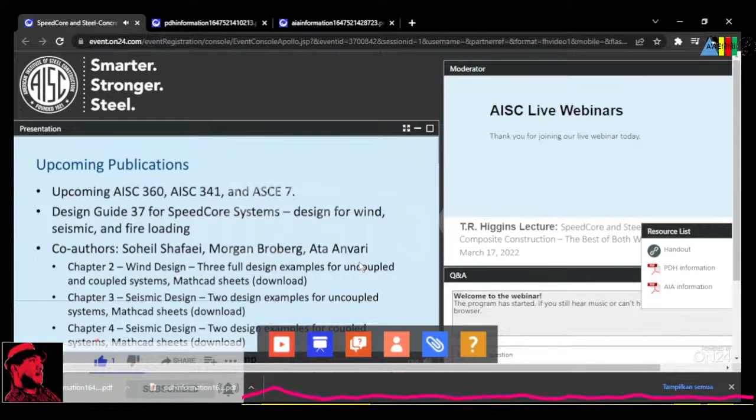With this, I would like to open up the floor for some questions and discussion. Thank you.